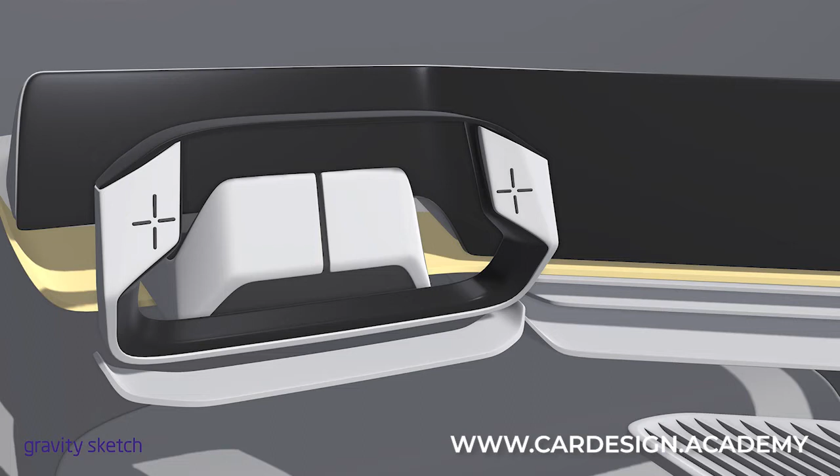In the last video, we focused on the instrument panel. Based on the initial layout I did previously, I developed the instrument panel. So now with the driver removed, you can see I've developed a design theme for the interior for the main instrument panel. Also, the interior is designed to be a desk which slides out, becomes a mobile office.

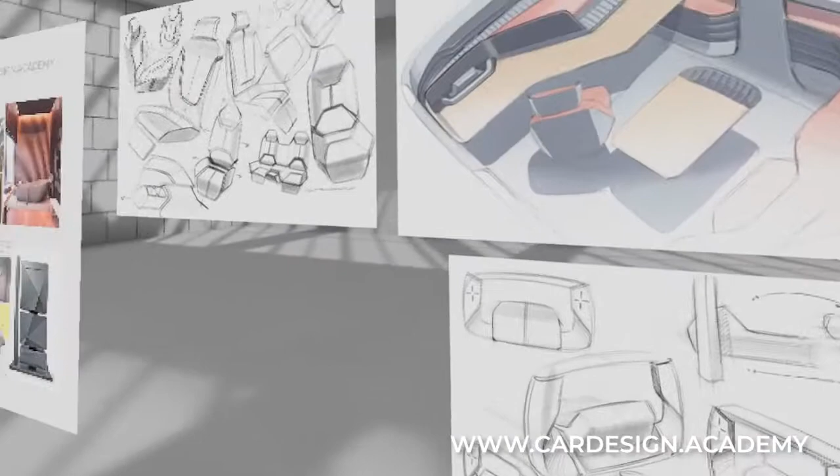So anyway, based on a series of sketches that I did, I'm going to be continuing the development on the interior components. Today I'm going to be focusing on the steering wheel.

I started with a series of sketches that I did in a previous video, just a quick time-lapse, doing some quick ideation on the steering wheel.

There's been a lot of talk about this sort of open-topped Tesla-style pilot steering yoke that Tesla pioneered. The idea is that you completely open up and unclutter the view of the display screen ahead. That's part of the reason why steering wheels have been evolving toward a squarish shape, and then ultimately Tesla decided to cut off the top of the thing. It's actually been in student work since the 50s.

But anyway, I think with a pickup truck, with a lot of off-road use, there's still going to be a lot of hand-over-hand steering. I think what Tesla's betting on is perhaps steer-by-wire, or automated parking, which takes over most of the functions that would require hand-over-hand steering. But with trucks, you're still going to want to have that complete shape.

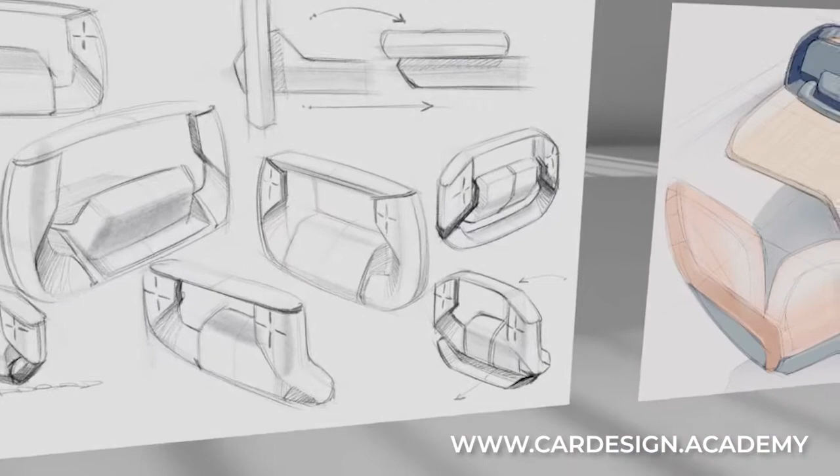However, in order to minimize the obstruction of any display screens, what I thought about is just doing the pilot steering open, bridging the top of it with a very slim, almost blade-like quality.

The other unique feature of this steering yoke is that it has to fold down and retract into the instrument panel, so that when you're at the job site and you've engaged the mobile office, pulled the desk out, the steering wheel folds away and is completely retracted. And who knows, maybe in some autonomous highway driving, you could do the same thing.

It's also very important that you have ample space for thumb controls. More and more of the vehicle functions are being controlled on the steering wheel itself.

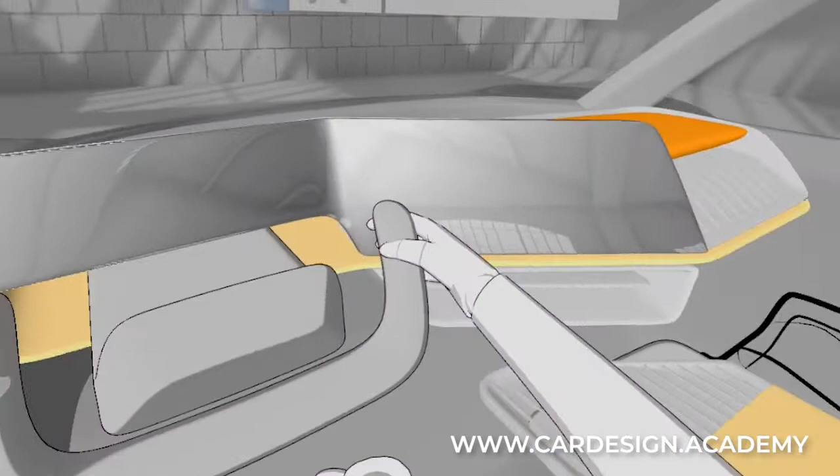I really place a lot of emphasis on the steering wheel, steering yoke, or steering device, whatever you want to call it, as a core experience of any vehicle interior, because that's the thing you see the most, you're touching the most. It's really important to get it right, and there's so much functionality to it now beyond just steering.

So now I'm sitting in the driver's position, aligned with the driver's head, just kind of sitting in a forward view. I'm thinking again about this view ahead of the display screen, and right away I can see that as long as I keep the top of the steering yoke fairly low and flat, I can minimize the obstruction. Then this sort of hook shape, having this very slim steering column in the center of the steering wheel hooking up, is going to enable the steering wheel to lay down in the folded position. That's the idea, we'll see how it works in practice.

I may end up having to do some adjustments to the instrument panel design, but let's go ahead and get started.

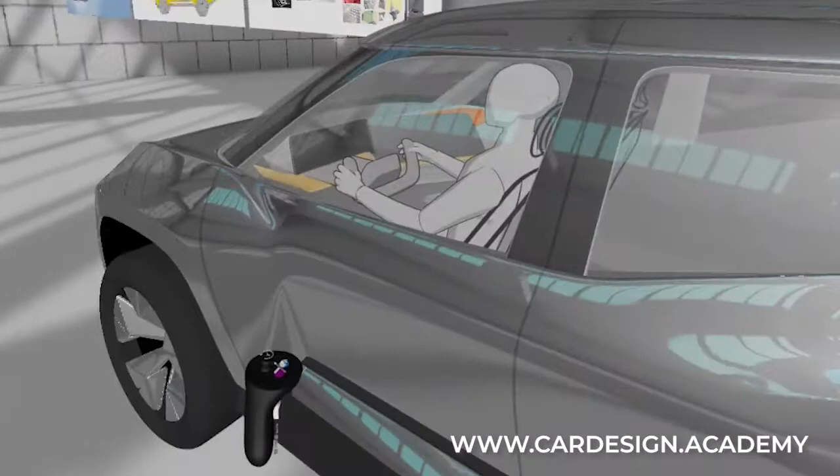First thing I'm going to do is turn off much of the exterior, all of the exterior. Turn off the exterior, the cut lines, the glass, the headliner, and the tires. So I have nothing but the tub and the main instrument panel.

Now, in order to do this, as we get into the seat design and the steering yoke design, we're going to be dealing with a symmetrical object. So off the bat, I've already created a layer for steering, and I'm going to duplicate this guy. First thing, I'm going to turn on my mirror plane so I can see exactly where the vehicle center line is. I'm going to take this guy and duplicate him, send him to the center position.

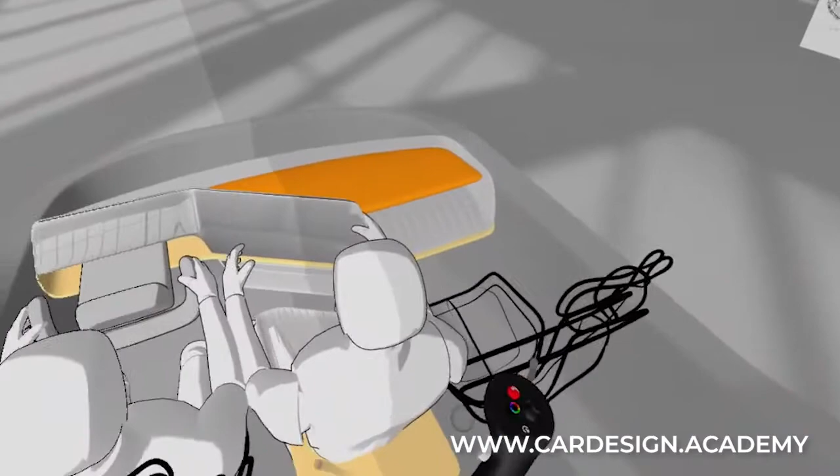We're actually going to turn off the rest of the interior so we can focus entirely on the steering system. I'll go ahead and duplicate the steering yoke as well and bring that to the center position. Let me do that one more time. I felt it click at center, so that's good.

And while we're at it, we'll do the seat in another demo. But I'm going to grab these two objects and send them over to a new layer that I call steering. We'll put that in the steering layer. We'll put him in the steering layer.

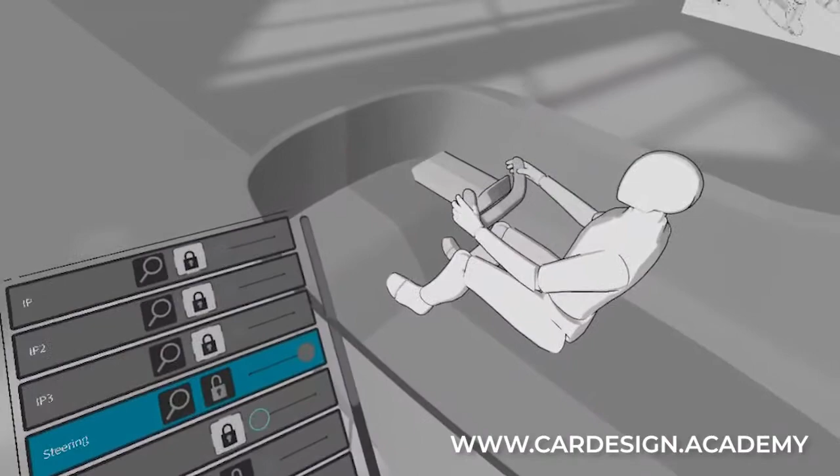Okay, and then we're going to just proceed to turn off the rest of the interior. So we don't need to see the IP right now, and we don't need to see the tub either. So I'm going to go ahead and save this.

I'm also going to grab a copy of the sketch and just bring it right here, so we can look at it as we're doing it. I'm actually thinking about it image-wise. I think this is a really cool looking steering yoke. It looks like it could articulate in a couple of different ways beyond just simply folding. But some of these more simple designs might work better. We're going to see what works for the actual folding.

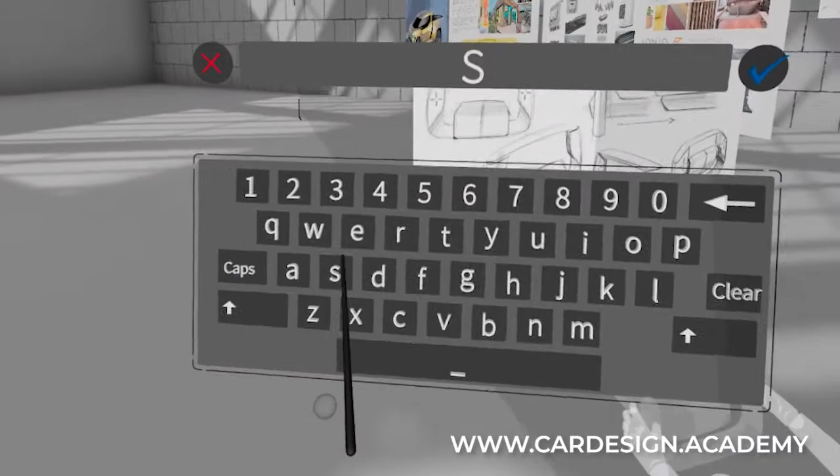So what I'm going to do first is create another layer. I'm going to call this layer steering package. This will be a temporary layer, and then we can dim this down. We can create another layer, and we'll call this steering, steering wheel. We can put the sketch in there as well for the time being.

So steering package, we can just dim that down really, really dark. Right off the bat, let's go ahead and get started. I'm going to lock this layer, lock this, so all we have unlocked is the current layer. Going into my sub D stroke tool, ribbon mode, sub D turned on, I'm going to go ahead and pick a kind of a light material that can catch the light really well.

I want to try this idea here where the thing sort of bends in the front view a bit. If you remember in the last video, I really like to work in pure polygons first, so I work with the sub D turned off until I have everything absolutely spot on where I want it. And I'm going to try to capture the desired thickness and all of that.

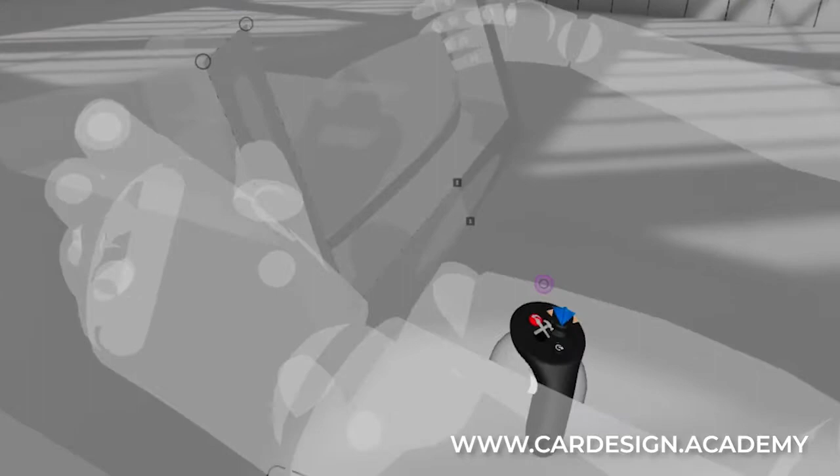One thing that's nice to have is that mannequin, to put yourself in that position and be able to put your hands right there, to see what the desired proportions should be. I generally believe that a proper steering wheel is about shoulder width. It might be a little narrower than that for a sports car. For an everyday car, generally speaking, I think about shoulder width is right. So you can see it's pretty well aligned with the mannequin shoulder.

So I've just generally laid out that shape, and then I'm going to take the extrude tool. I'm going to turn on hold auto select loops. I'm going to take the whole surface here and just extrude it straight back.

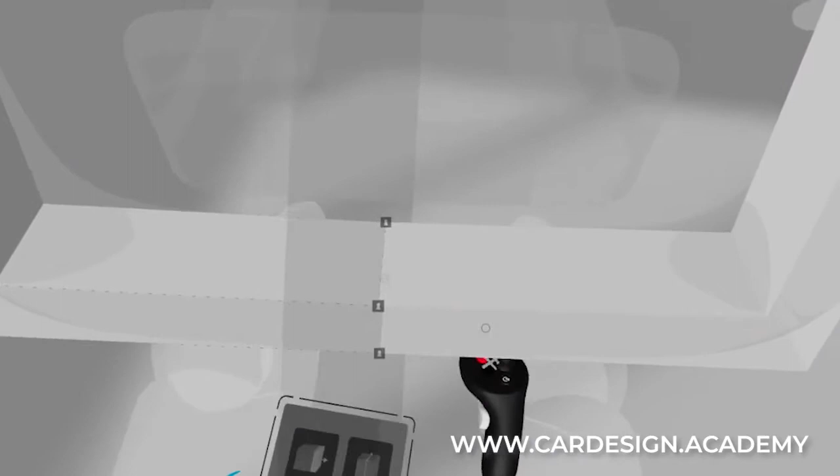I'm actually going to darken this a little bit, just a little bit, so I can see what's going on. And I'm going to go ahead and just straighten up, make sure all the points are nice and aligned and straight.

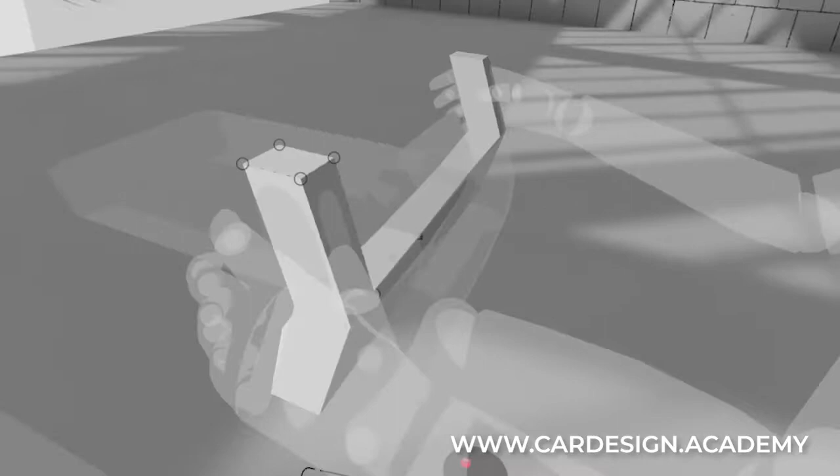Okay, then I'm going to close out the front surface again. So I want to start to capture this idea of the bending here. We're going to prototype this thing first and make sure that it's going to work before we try and finish designing the steering wheel. So with that said, I'm going to just move all these edges forward a bit. And it might work and it might not.

And then I'm going to connect this across the top as well. So I'm going to put an edge loop here, and then I'm going to grab this little square here and extrude straight out like this. Delete that inboard surface and join it at the center line. Now it's looking a little bit thicker than I'd like.

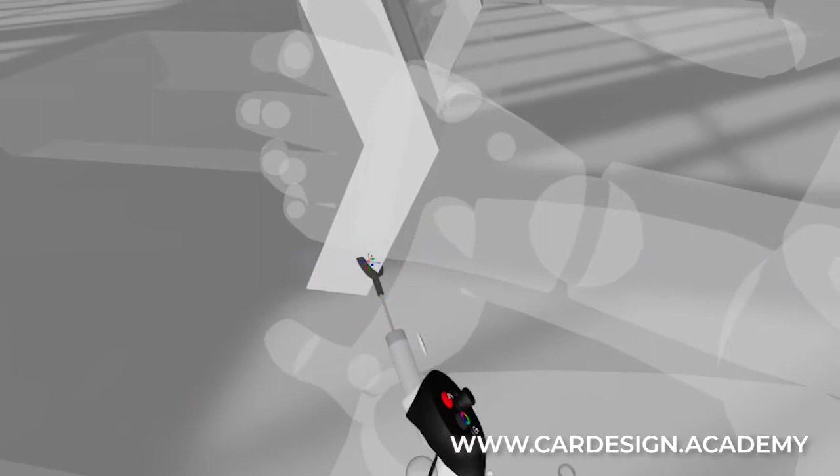Okay, so I have a basic shape here. Now I'm going to see how this one folds against that hub. So what I'm going to do is I'm going to take my tool belt. I'm going to grab this little guy here and click the button to, let's try that again. Trying to remember how to do this. There it is. Okay, so now I can set the pivot point, grab the...

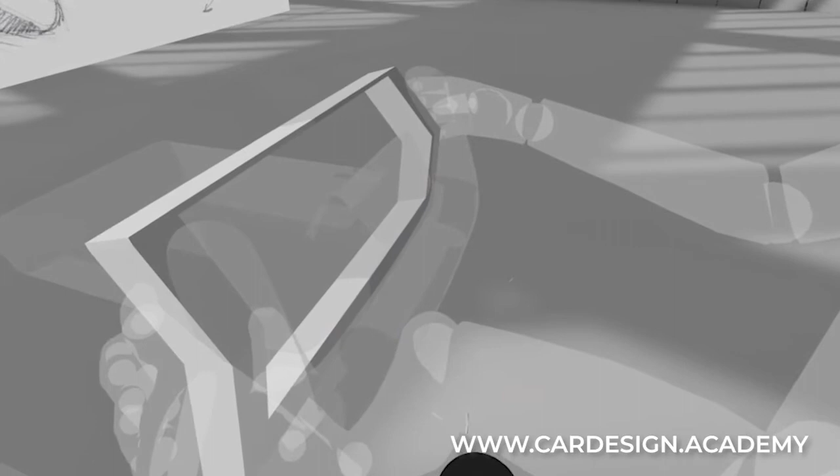So the idea is that it would basically fold down against the top of that steering column. Like that. Does that work? Well, now it's out of position, so let's go ahead and put it back to where it was. Let's try that again. Maybe that's not the right pivot point. Let's try a different pivot point. Maybe kind of midpoint here.

That kind of works. So that way I know I'm going to need to have something that joins the rim of the steering wheel more at the middle section here. Okay, so now that we have the basic shape where it needs to be, what I'm going to do now is I'm going to temporarily turn off the steering package. Now I'm going to really start to focus on the form and getting that squared away.

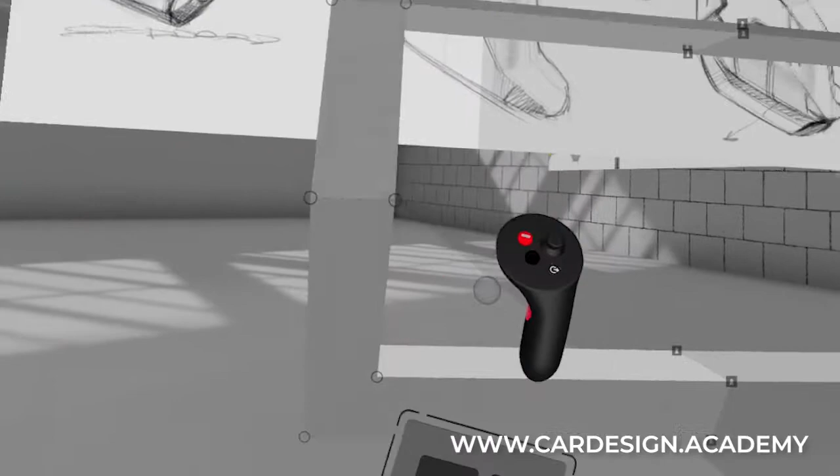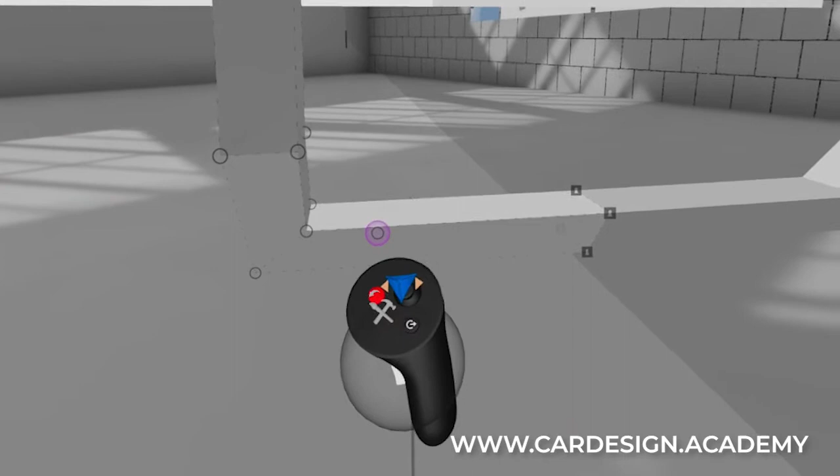It just feels a little bit balanced to me, so I'm going to try to alter the balance slightly, meaning that the bend doesn't happen right in the middle. It happens 2/3, 1/3. Ratios are important. Okay, so the other thing that you see is that the top of this thing is actually beveled, so it's not going to go straight up and down. It's not going to go straight across. It's going to actually bevel down. So I'm going to go ahead and start to bring that down. Making sure everything is nice and straight.

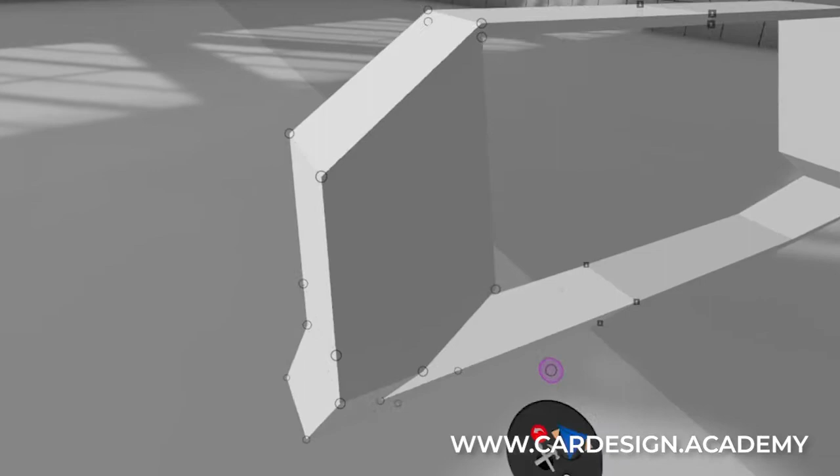Then I'm going to start to develop this shape here, the thumb pad, if you want to call it that. And actually, where that bend is, it's actually more in line with that. So if you see your polygons start to get a little out of control, it's okay to just delete them and rebuild them.

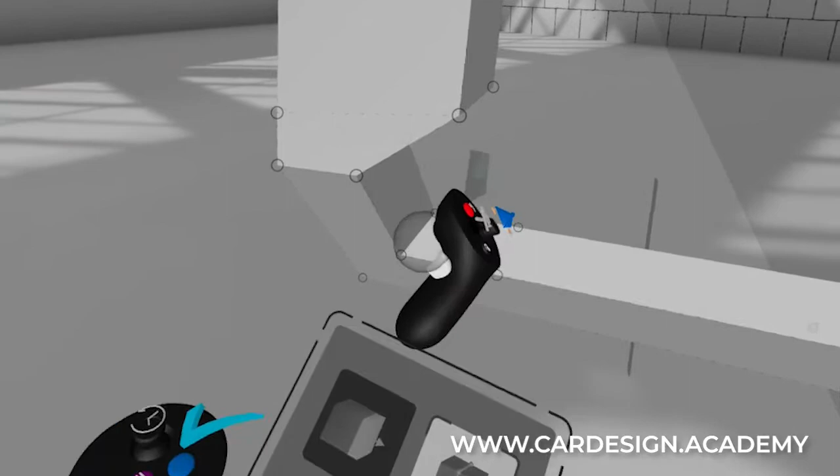Okay, and then the other thing that happens is the section kind of changes from a fairly squarish section to a more chiseled triangular section. So I think there's a couple ways to do that. So I'm just going to start to work with these polys a bit. It's starting to give it a bit more dynamism. What we want to avoid is twisting shapes. But on an interior, it's not quite as big a deal because you're not dealing so much with reflective surfaces.

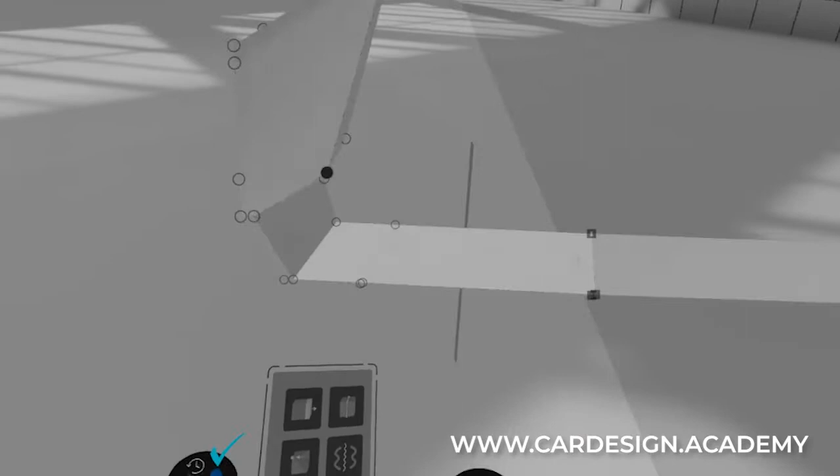It's starting to look like the intent here. Let's just do a quick check and see what it looks like in sub D. It's quite soft right now, but as we start to add structure, it's going to tighten up quite a bit. So as I add sections, as I add edge loops, I can start to add some crown and section.

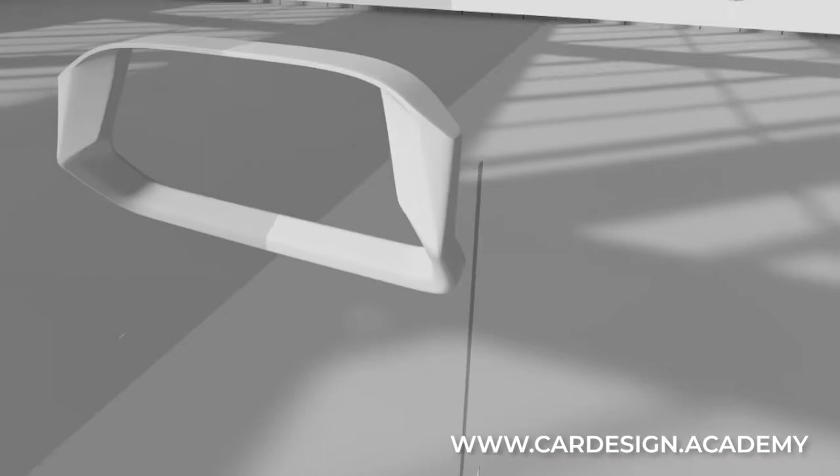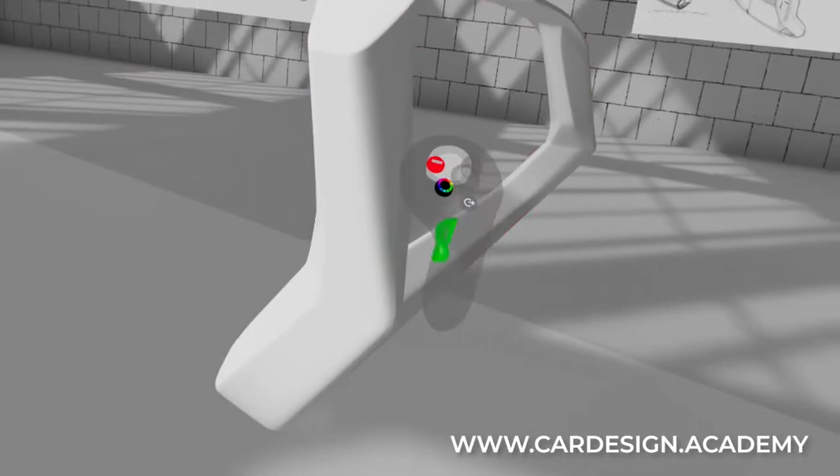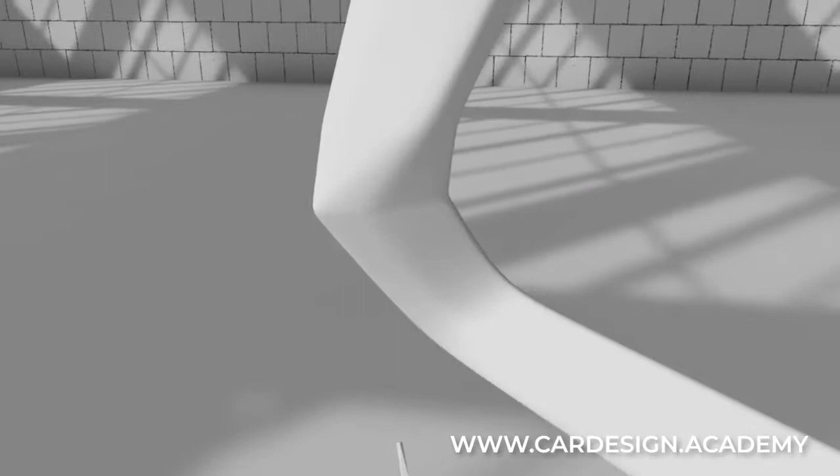You can see the more edges I add, the more chiseled it gets, which is what I want. I want it to have a nice structured, chiseled look to it. All right, so this is going to be just a substrate. There's actually going to be multiple components to this, so I'm going to leave it at that.

And the next thing I'm going to focus on is the hub of the steering wheel. So let's go ahead and turn our package back on. What I might just do is grab the one I already built and start from that.

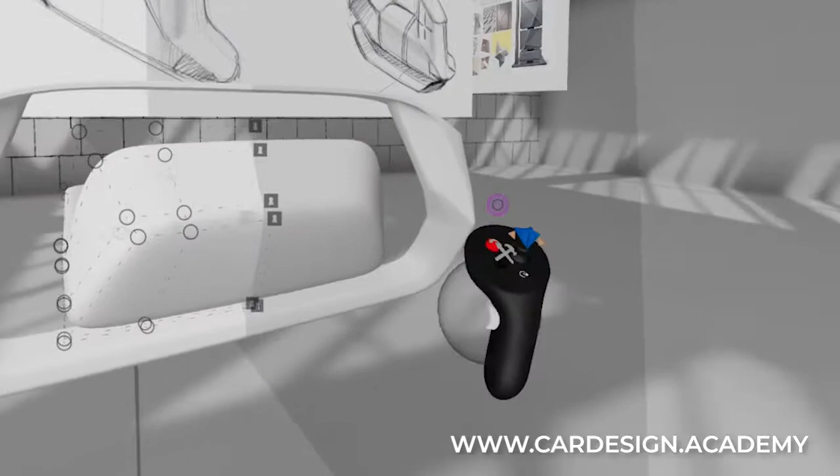Now, it does look a little strange. I think kind of biting under like that, it feels a little like it's got a bit of an overbite. Plus, I'm a little bothered by the relationship between this edge, this transition, and these corners here. So I'm just gonna bring this edge down a little bit. That's better. I'm gonna make it a little more chiseled.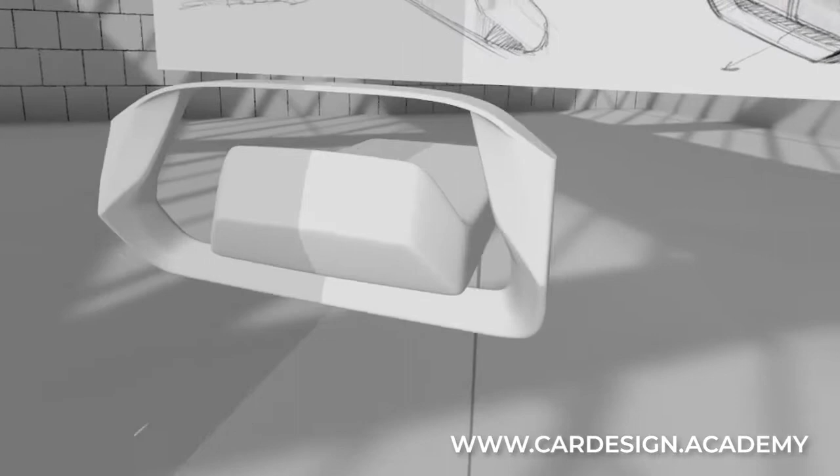Also get this surface aligned, so they kind of read like they go together. Yeah, I kind of like how these transitions are happening vertically. It gives it a nice precision look to it. But this thing coming out down here would be like an extension, so you still have this hand over hand control.

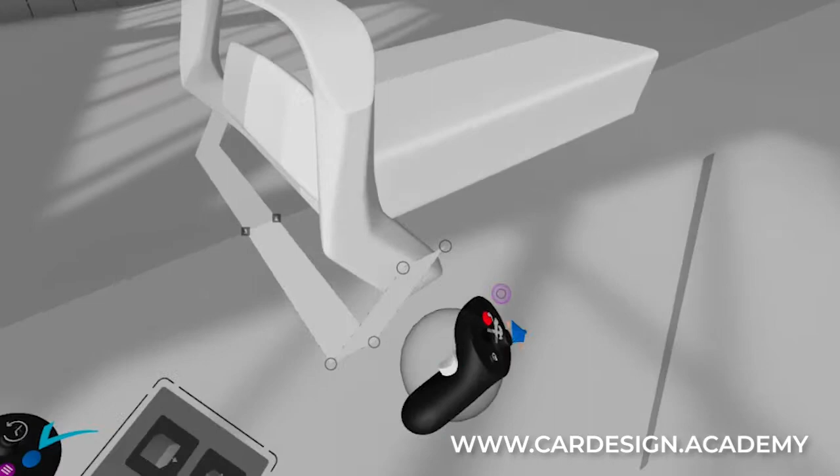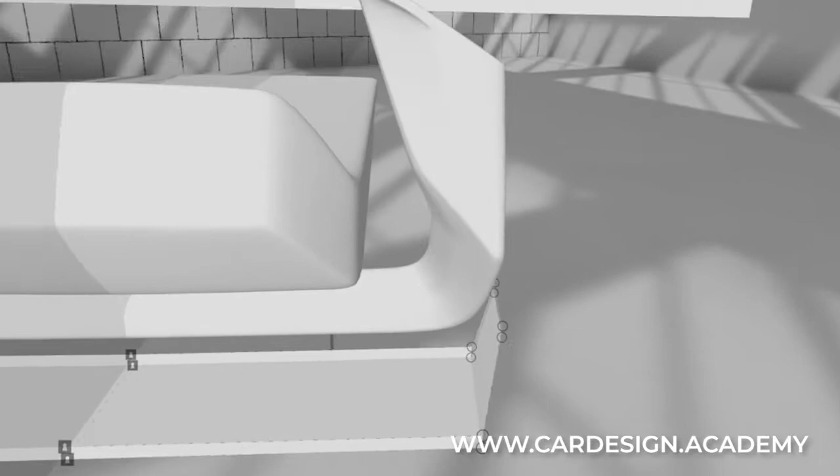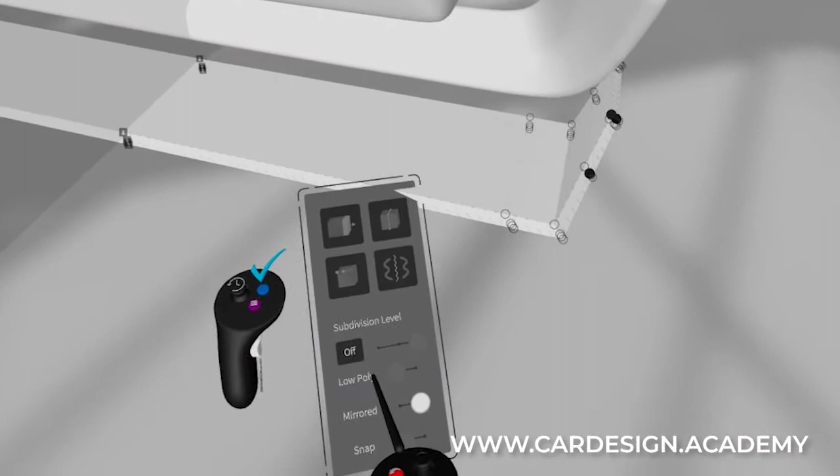And there could be some additional control features there. So I'm just going to go ahead and extrude a little bit of thickness in there. I'm going to match the top here, and then close out the top. Okay, so I put some geometry on it. Just giving it a little more bend.

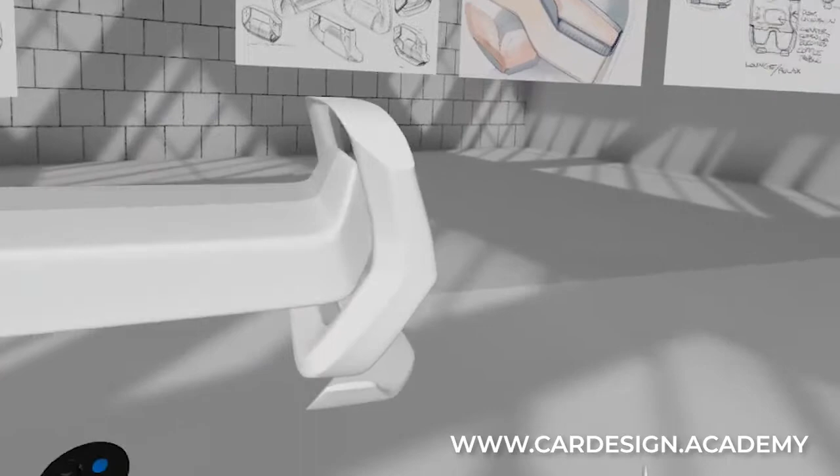Okay, so now I want to start to give this thing some color and material differentiation. So there's a couple ways to do that. We can duplicate the object and then go from there, and we may do some of that, but basically, what I want to do is give it some different materials. If you look at the sketch, for example, you can see it's sort of this two-tone material. So I want to start to capture that.

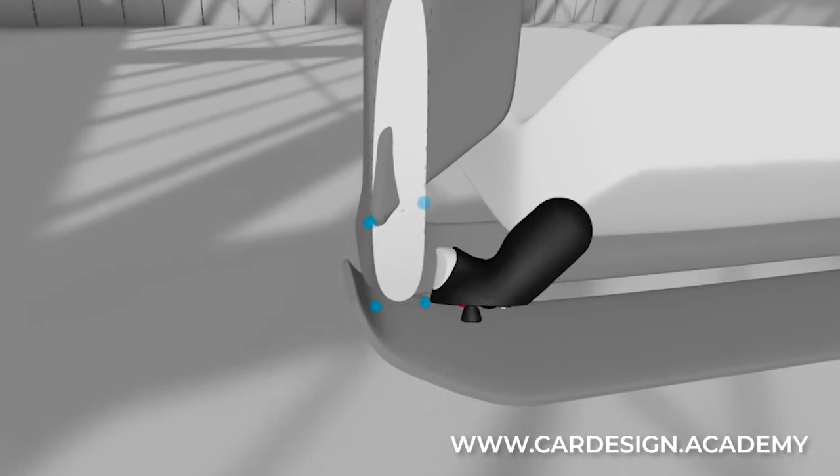So I'm going to select. I'm actually going to make this a darker material. Maybe make this a darker material as well. And then go back to my lighter shade, and I'm going to do this joystick. And I'm just going to overlay it. It's just going to overlap with the substrate.

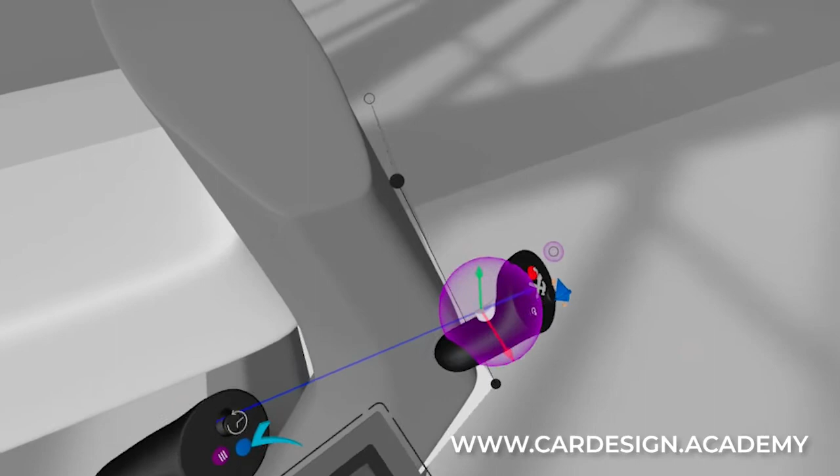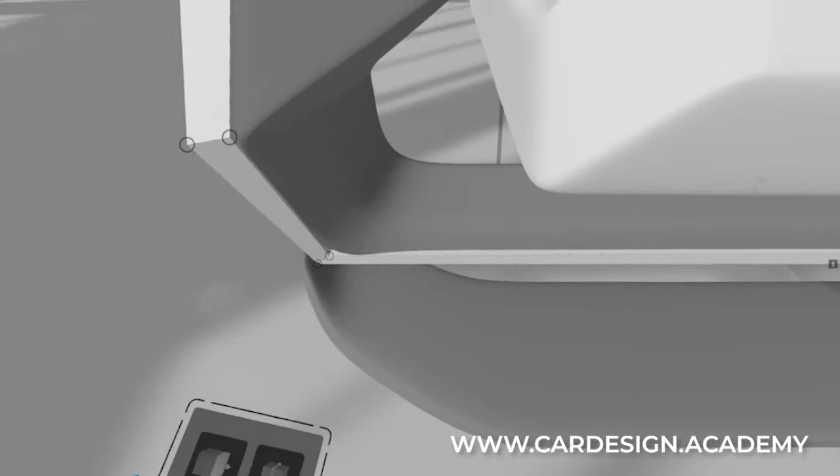Go ahead and make it pass through. Fill in the front again. You'll see shortly how enriching it is to have these various high contrast materials combined. I'm just trying to align the polygons so that when I start to smooth this out, it all makes sense.

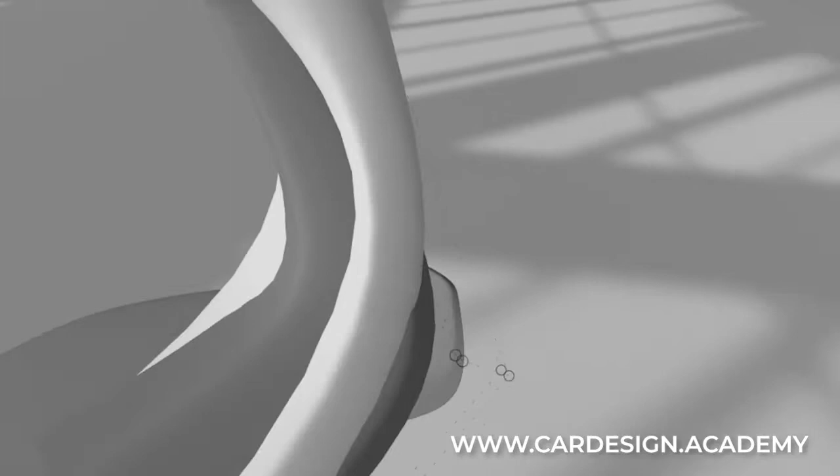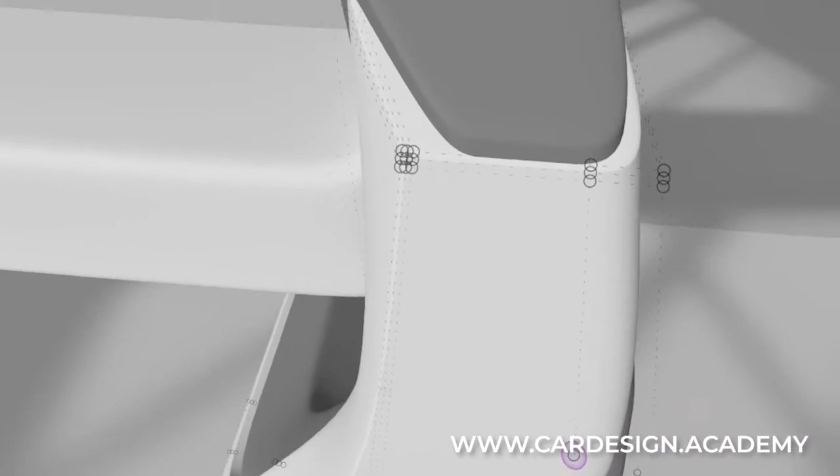So where these two parts join together, put a nice tight edge. So when I go into smooth view, it's like I accidentally deleted an edge. There we are. So now I just need to put the polys in the right place so that when I start to add edge loops, everything fits really nice. It's starting to fit pretty nicely.

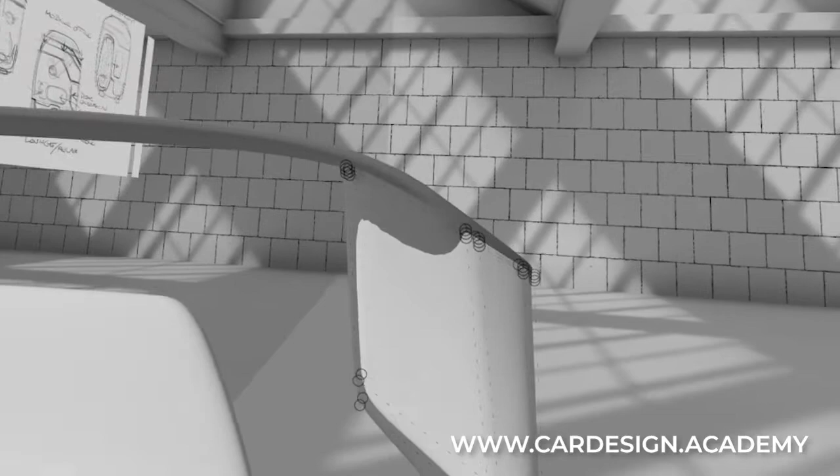So now I'm just going to be working these polys to try to maintain a fairly even panel, or fairly even separation. What I might end up doing is working the substrate a little bit as well.

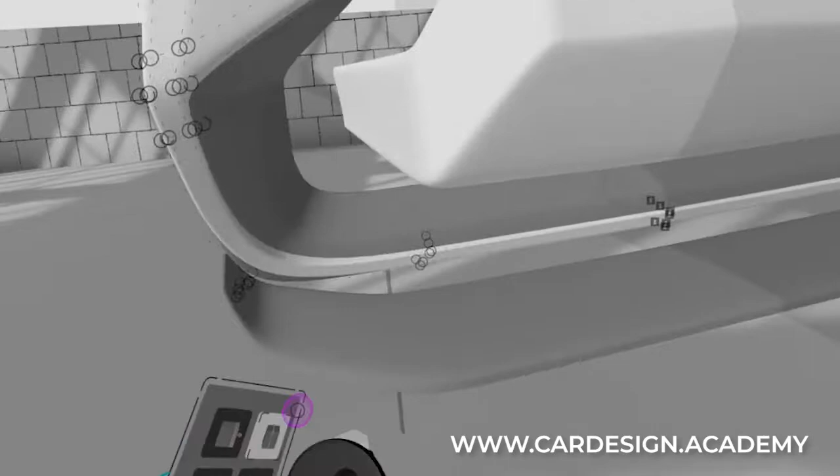So for example, I think I want to have a rounder corner here. So I'm going to go ahead and turn on the substrate again. I do the same thing I just did, and you can see as I'm moving it in and out, I can see the gap between the two parts. And I can really control the separation.

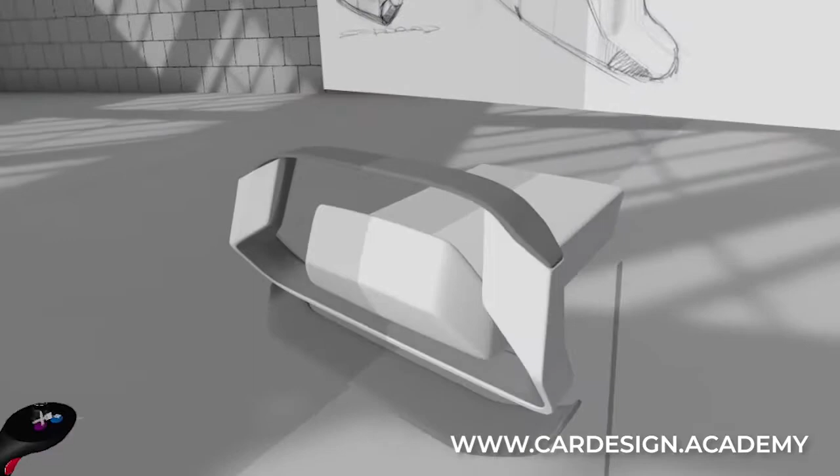So you can see it's looking like two very, very well crafted parts coming together. And then adding some metallic elements too will really help. Really help brighten this thing up.

Just trying to see what it looks like as a metallic element. That looks pretty interesting. Once I get into the PC, I'm gonna play around a little bit more with finishes. There's a lot more you can do on the PC with Gravity Sketch when it comes to materials and finishes. But anyway,

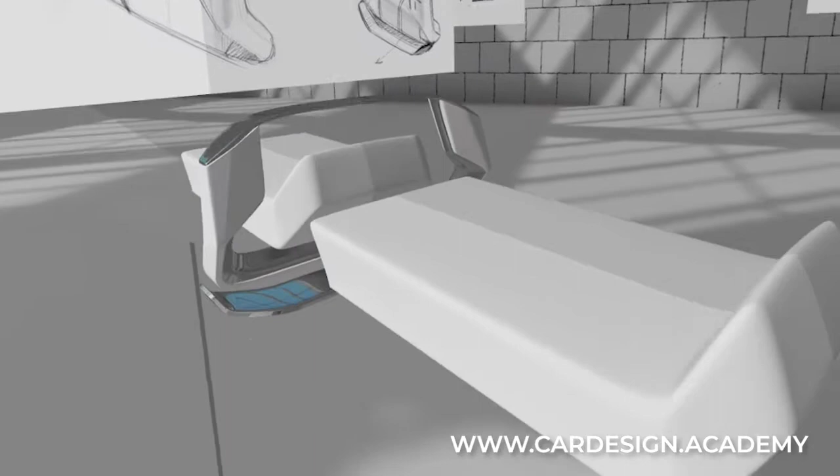so I want to do a bit of material separation on the hub as well. So there, I just duplicated it. And I'm going to turn this into the darker material. And then I want to put some white accents on there.

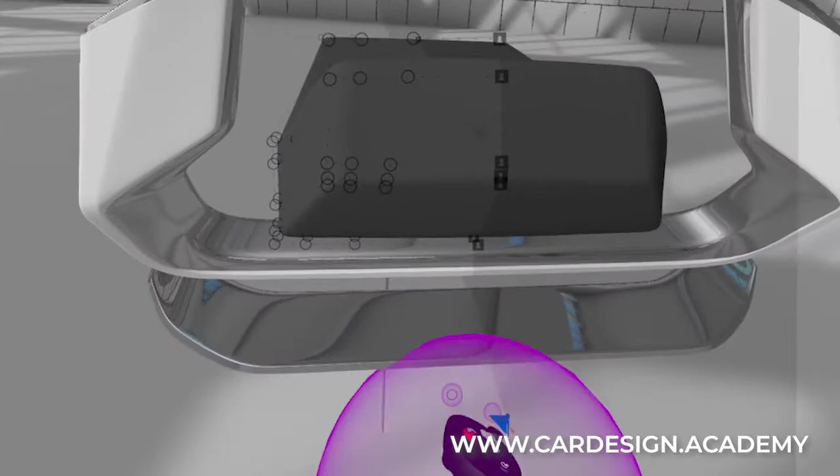One thing I just realized is I'm not on center. So I'm going to have to bake mirrored and redo the symmetry on this thing. I love how it automatically welds. And I can see here that I'm going to have trouble folding this steering wheel, so I'm going to just bring this back a little bit.

Before I get too far ahead of myself, I should probably do a sanity check and just fold this steering wheel again. So what I'm going to do is group these together. Just get that little wiggle out of there. So using my tool belt, and again, I think we decided sort of at the midpoint. Let's try a different pivot point.

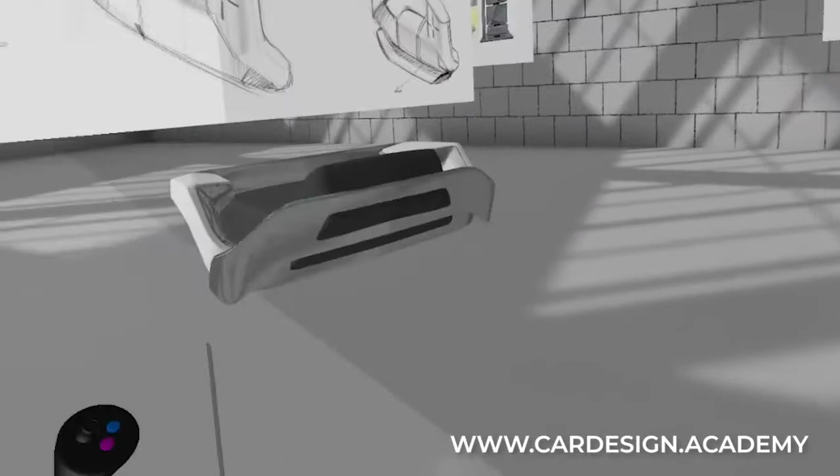There we go. That's a pretty good pivot point. Close, fairly close. So that tells me it's possible. We're just going to have to slim up the top of this steering column again. Or just bring it rearward and down. Just bring it all the way down here.

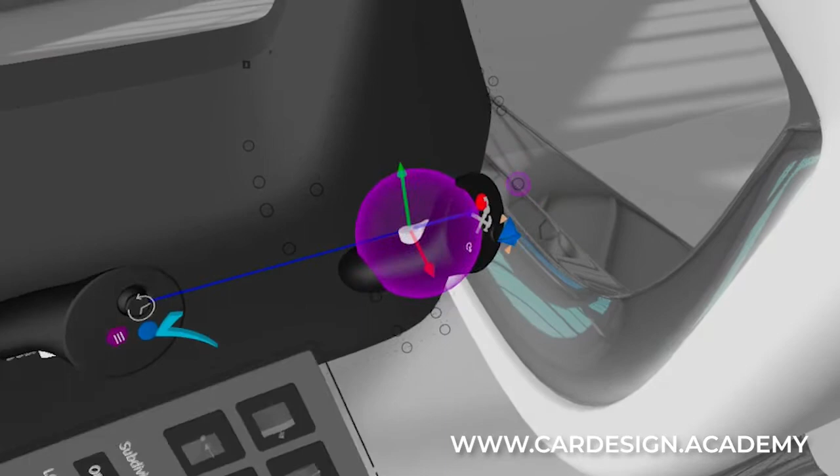That looks a lot more dimensional, which I like. So let's try one more time to pivot this thing. Yeah, that works really well.

Okay, so let's go ahead and add that material breakup. So what I'm going to do there is I'm going to bake mirror it. I'm going to cut the thing in half. I want to put it like a split down the middle.

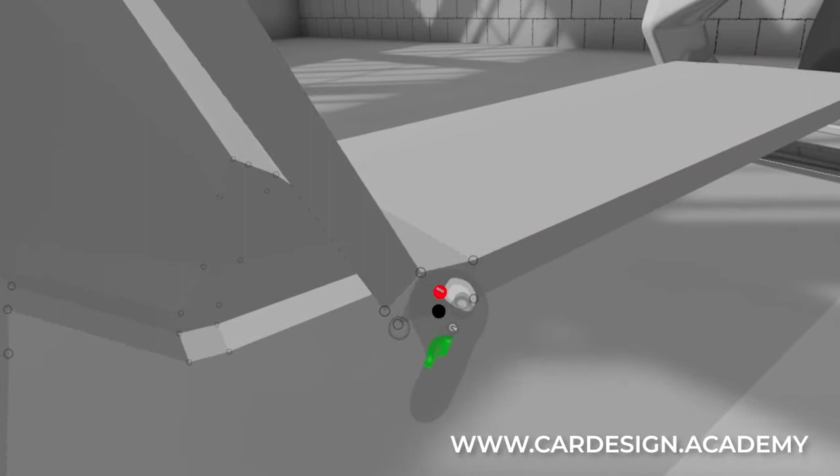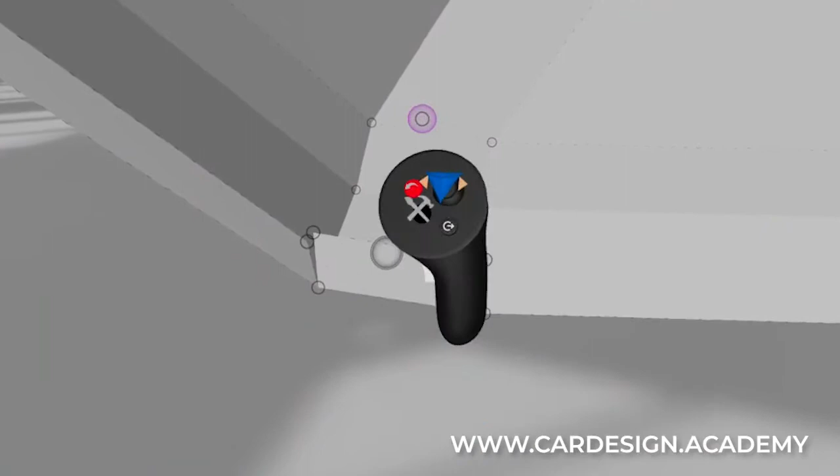And I want to give it some thickness. Let's go ahead and add that lighter shade. And give it some material thickness. Okay, so now it has a bit of thickness to it.

If there's any lines that are getting wonky, it's easy to just delete them and put them back on. So now that I added that hem flange, I'm just going to put an extra edge there.

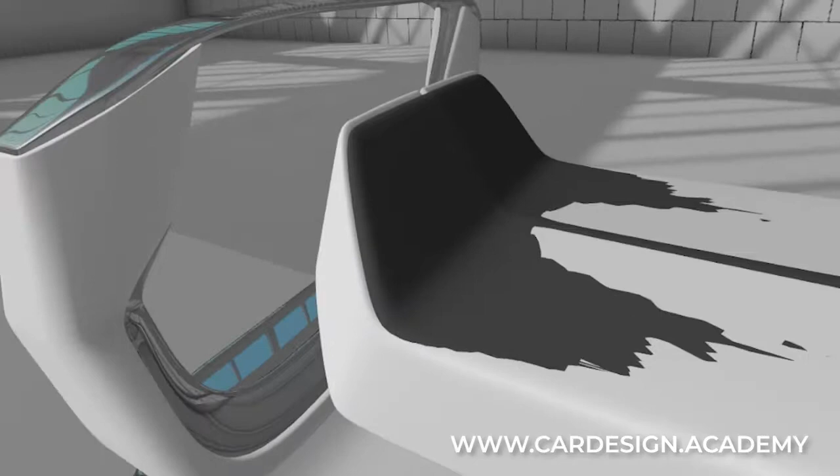That's looking a bit more precise. I think I like it where it shows on top in black as well. So I'm just going to grab all of these points and just drop them a little bit.

I'm liking that. So to top it off, I'm going to just put that sort of cross-shaped thumb button there. Actually, let's do it this way. Use the stroke tool, sphere-shaped.

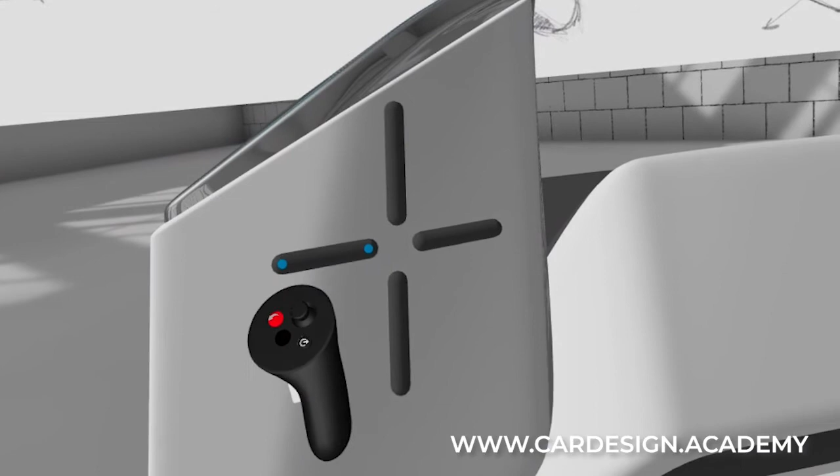Now, is that the right placement? We'll see in a minute. I'm going to group these together and bring them down a little bit so they're a little more comfortable in this thumb zone here.

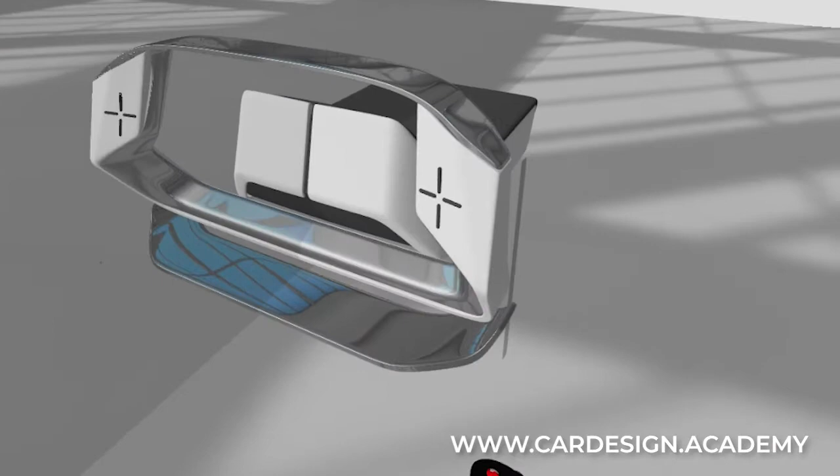I'm just going to work each point so that these sphere shapes or these tube shapes are kind of halfway into the surface. That's looking pretty good. So I'm going to go ahead and group this together. I'm going to save what I have.

I'm going to go ahead and turn on the interior again, starting with the tub, starting with the IP. So I'm just ghosting in the driving mode just to have the position of the steering wheel in the right place. So I'm going to bring that out to where it should be. Oh, one thing I forgot to do, I got to bake mirroring for each of these objects here.

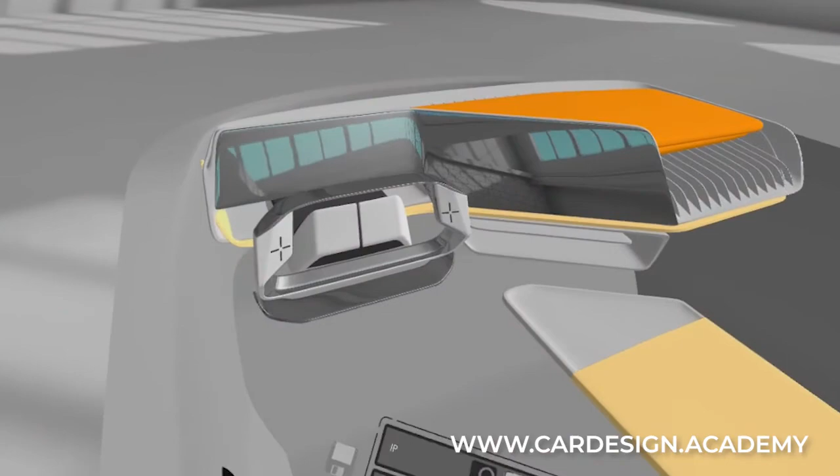So now if I turn on the rest of the interior, it's looking very compelling. Once you start to add the seats and the door trim, this is going to be a very cool interior. So anyway, that concludes the demo for today.